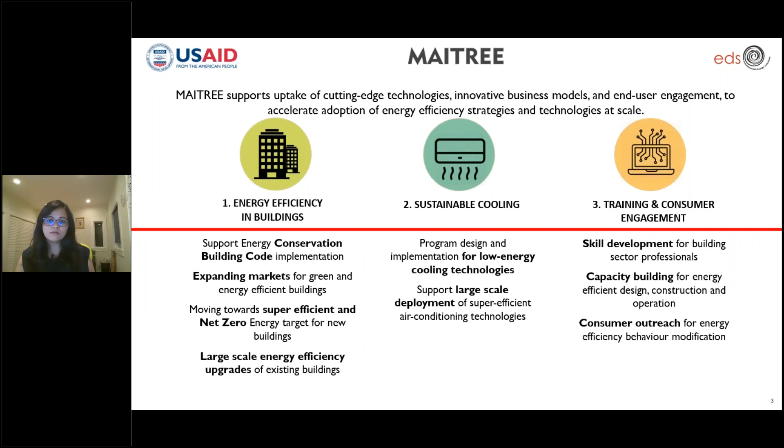The webinar series is executed under the MAITREE program supported by the USAID. MAITREE is the acronym for Market Integration and Transformation for Energy Efficiency. MAITREE supports three main program areas: energy efficiency, sustainable cooling, and training and consumer engagement. The program works in partnership with several organizations such as Energy Efficiency Services Limited, Bureau of Energy Efficiency, and others to implement various initiatives.

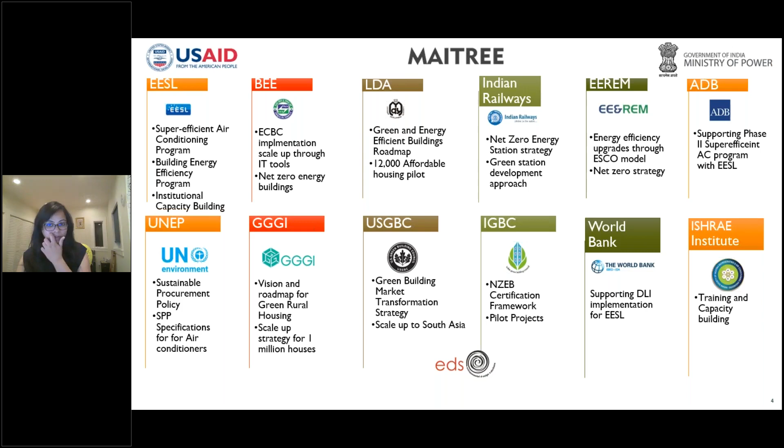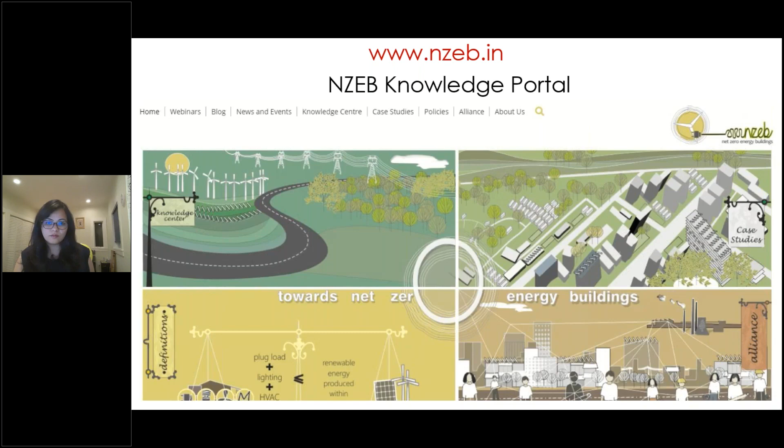The market transformation approach includes creating business opportunities for the private sector, scale up of potential initiatives, and enabling policies as well as providing trainings for net zero energy buildings. MAITREE is supporting efforts moving towards super efficient and net zero energy targets for buildings in India. The Net Zero Energy Building Knowledge Portal is a one-stop site for information on NZEBs. You may explore this further on the website nzeb.in.

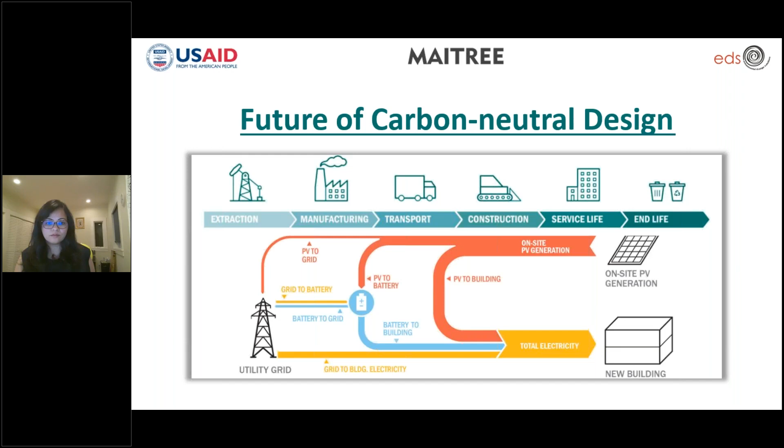In today's webinar, we are going to learn about the future of carbon neutral design. With growing demands to address climate change, we need to go beyond just addressing energy use in our individual buildings, taking an integrated approach to address both energy and carbon emissions through the entire life cycle of a building. Under the MAITREE program, we are working on grid integrative net zero energy buildings to spread awareness for accelerating the efforts toward decarbonizing, decentralizing, and digitalizing the grid of the future for India. We will share more information on it very soon.

Let's now learn about carbon neutrality from Shruti, the expert speaker for today's session. Shruti is joining us from San Francisco, where the time zone is just the opposite. It's 9:30 p.m. over there. Welcome to the webinar, Shruti. Thank you very much. Very happy to be here.

Shruti is an award-winning sustainability consultant with 15 years of experience in advancing sustainability within the built environment. She has led multiple highly ambitious and complex projects from laboratories, museums to master plans. Her work has been presented at several leading industry conferences. Shruti combines technical competency and creativity across architecture, engineering, and master planning, and has developed deep expertise in passive systems, energy optimization, and carbon management.

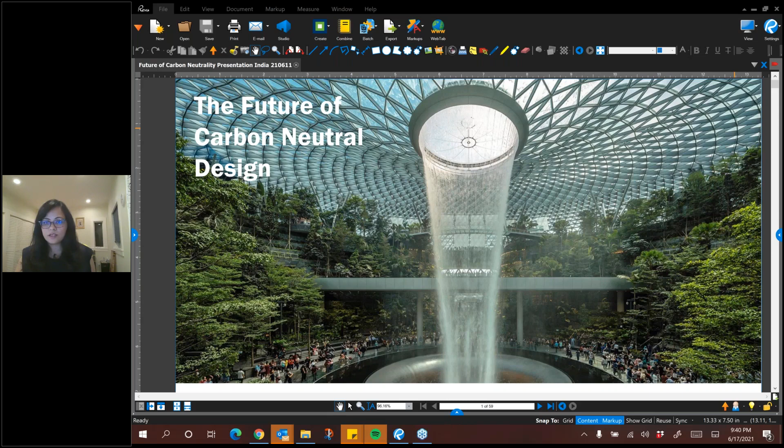All right, fantastic. Thank you very much for the introduction. Let me share my screen. Hold on for 1 second. Okay, are you able to see my screen now? Yes. Okay, fantastic. Oops. I'm gonna do it this way and get into presentation mode.

Thank you everyone for attending this webinar, and thank you for inviting me to speak on this topic, which is very close to my heart. Just a brief introduction: I'm born and raised in India and migrated to the United States several years ago. My professional experience has been in North America. In this presentation, I hope to share my experience in designing high performance buildings and where the future of carbon neutrality is in the context of North America, and also some parallels around sustainability issues and drivers that may be relevant for India as well.

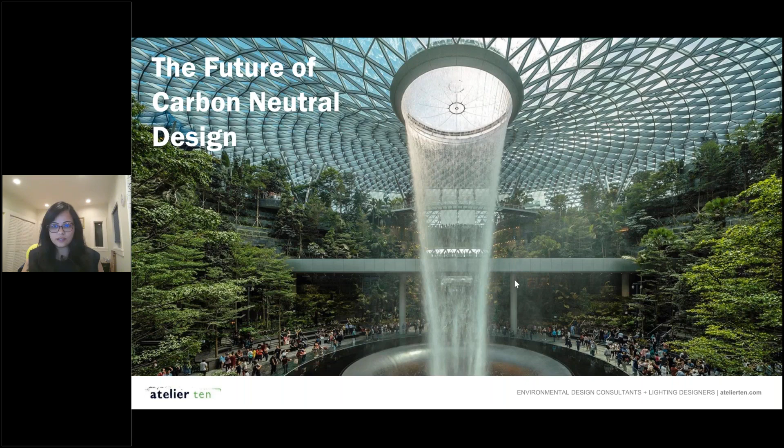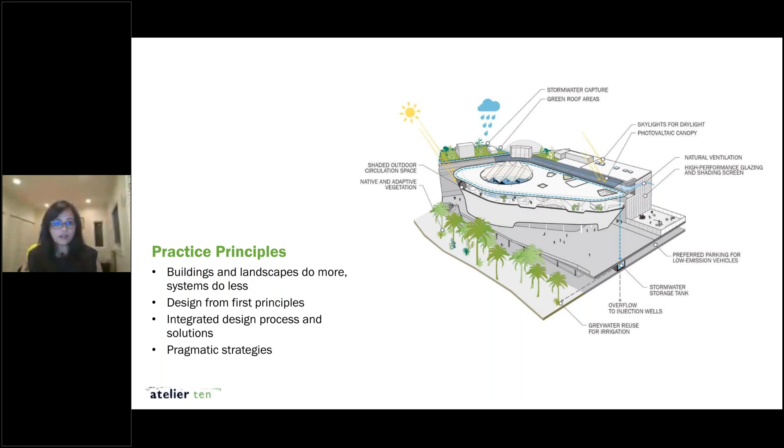A little bit about my company. I work for a company called Atelier Ten. We are a progressive group of environmental designers committed to making a positive change in the built environment, a team of architects, engineers, environmental policy experts and lighting designers lending our own perspectives. Our practice principle is that we want our architecture to do more, systems to do less, and be pragmatic in the way we design our buildings. We offer our services mostly through consulting, under the umbrella of what we call environmental design, which consists of many things listed here.

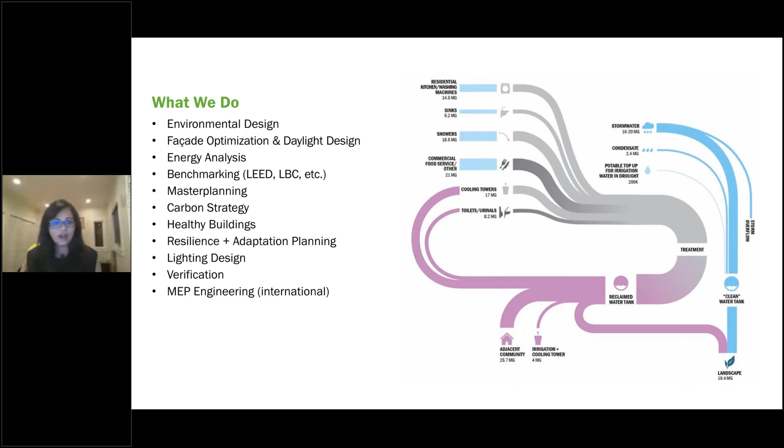And we have 11 offices around the world. We are quite global in that way, and we've been around since 1990. We run our company quite collaboratively and draw from all the international experience and climate zone and regional experience that we have around the world. I just put this slide together to give you some sense of where I'm coming from and what my perspective might be. So carbon neutrality has been a hot topic, at least in my world.

What we have been seeing and what we have been actively doing through our work is looking at carbon neutrality on a variety of building types and scales. So what you see here is a project that I'm actually going to present quite a bit in detail, the California College of Arts expansion project, which is a very fun project here located in San Francisco. It is a smaller project that deals with carbon neutrality in a much more meaningful way than we've done before. And it also has a cool hydrogen story. So I'll get to that in a little while.

We've also dealt with carbon neutrality on campus scales. We recently completed the UC Merced 2020 campus, which consisted of 11 buildings that were designed and built under 5 years. And they're all very high performance buildings. And the goal of the whole campus is to achieve carbon neutrality.

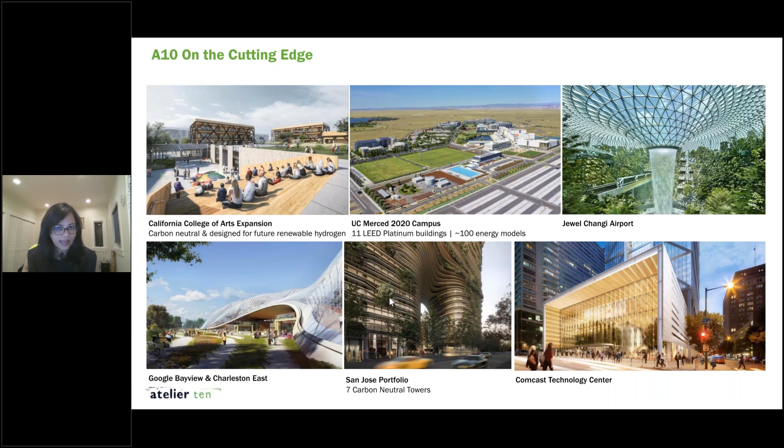And then the Comcast Technology Center here is also one of our highly performative projects, where it's a high-rise building in a cold climate, achieving really high performance goals. So again, just giving you a sense of the range of projects that we're looking at to move the needle and make progress here. And I have cherry picked one of them to present today.

So before we get into the particulars of the project and even the particulars of this topic today, why carbon? Why are we talking about this? And most of you may already be aware of this, but a few years ago, in 2018, the Intergovernmental Panel on Climate Change, the IPCC, released a new report. And the understanding before the 2018 report came out was that the critical threshold for acceptable climate change, global warming, is 2 degrees Celsius. That was considered to be a worldwide accepted threshold.

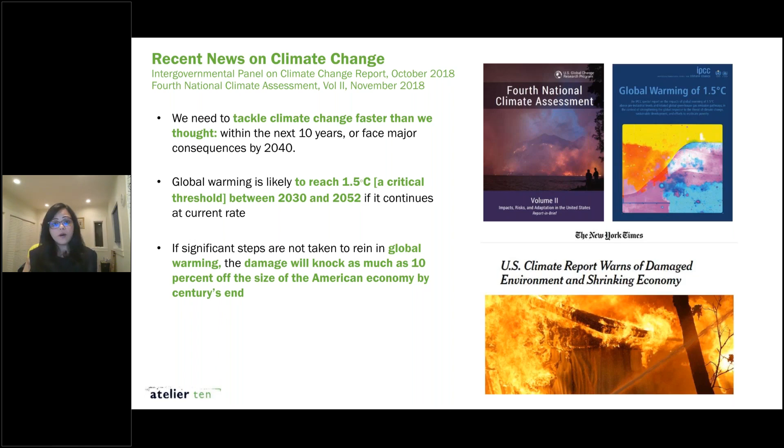And then in 2018, this report came out, in which the scientists warned us that, in fact, we need to be under the 1.5 degrees threshold, and that we are likely to start seeing effects of global warming as early as between 2030 to 2052. And just thinking of that for a moment, 2030 is literally 9 years from now. So that really prompted us to think about how we are talking about carbon and what actions we're taking right now in this decade to make a meaningful impact on the built environment.

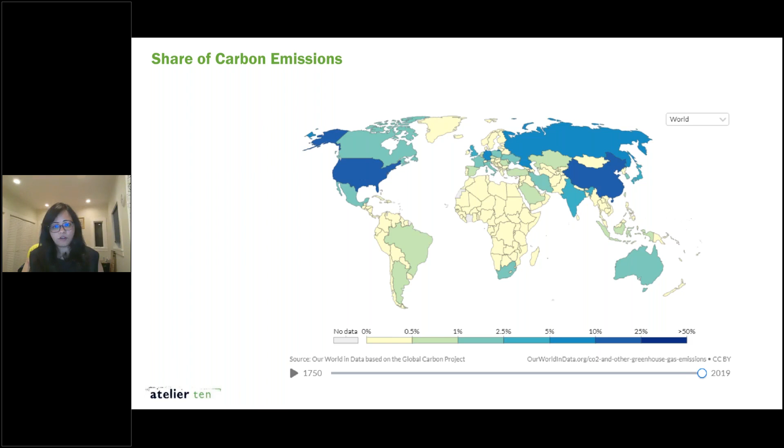And speaking about carbon emissions and climate change, inherently, climate change is unequal. There are certain countries who have contributed in the past and still do in a much more significant way to the global carbon emissions than others. And yet, the effects of climate change are spread worldwide and are unfortunately hitting the countries that may be least prepared to tackle the effects of climate change.

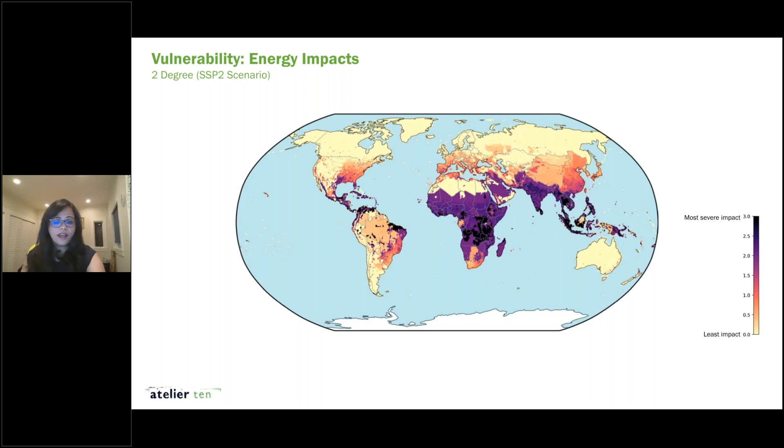And we're looking at a 2-degree scenario here. The next one, we're looking at the energy impacts, and this encompasses clean cooking access and heat events and cooling degree days, and also hydroclimate risk to power plants on how power will be delivered to cities and to houses. And then the land impacts, which covers crop yield change and habitat degradation and agriculture, water stress, and nitrate leakage.

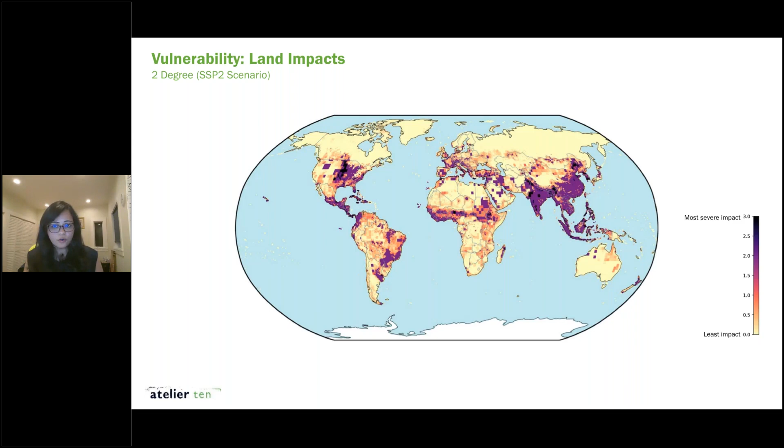So all these issues, as you can see, are very much relevant, and no matter the cause of climate change, whatever it is, I think it falls onto everyone to at least prepare for the effects of climate change. And I find this very interesting. I think India is on a cusp of a major revolution here, which is the opportunity of this decade.

And think about this statement for just a moment, that 70% of India's 2030 urban infrastructure is yet to be built. And so we're talking about from now until 2030. And India has signed up for the Paris Agreement, which commits India to reduce carbon emissions by 33 to 35% below 2005 levels in this decade by 2030. It also has committed in a non-committal way to having 40% renewable energy supply in the power mix by 2030.

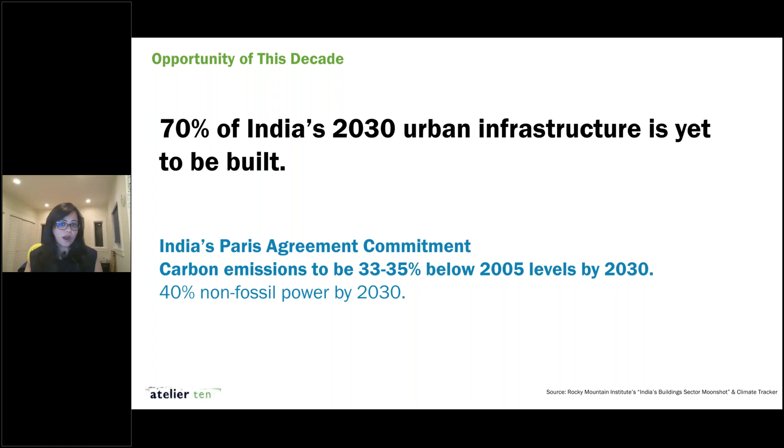So this decade seems like there's a lot of things going on that are especially in architects and designers' control, and that'll tell how the future of these buildings that are being built, that are being conceptualized right now, and that'll be built in the next decade, and that will be occupied in the next 50 to 70 years, how those contribute towards climate change.

But really, for India, I feel like, and also in several parts of the world, it's not just about climate change. It's not just about reducing greenhouse gas emissions. That is, of course, the priority of how the buildings can reduce carbon emissions at all life stages. And we'll talk a little bit about this, all life stages, in more detail.

But then it is also about energy and water security, of how do we design strategies and how do we design the built environment to have reliable access to energy and water all year round. And at the same time, how do we also get the buildings ready to operate without water and power, at least at certain times of the day. And then, building in resiliency on how do we make the buildings ready to combat the effects of climate change.

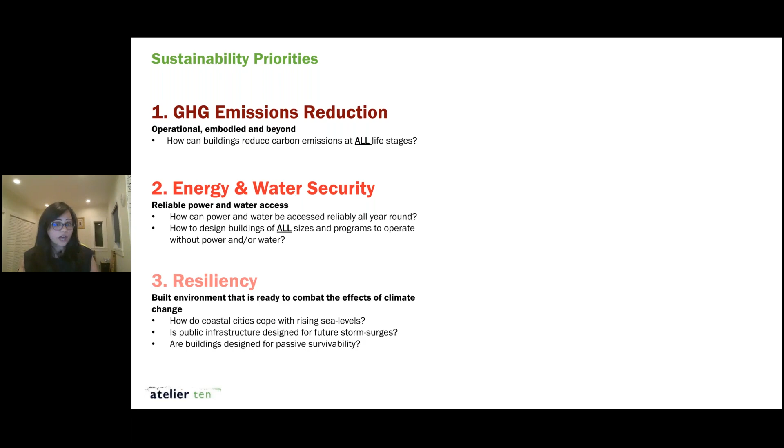And the issues vary depending on which place you're looking at. So how do we identify those issues? So for me, climate change and reducing greenhouse gas emissions and designing for carbon neutrality is considering all these elements and hopefully coming up with strategies that address all of them. And just to again put it back onto my experience and what we deal with on a day-to-day basis. Here in the United States, it's no different.

San Francisco, California, sorry, has committed to having 60% of its electricity be carbon-free by 2030. So similar targets. And then also has committed to have all electricity be carbon-free by 2045. New York is slightly ahead here, very competitive, 100% renewable electricity by 2040 and 70% renewable electricity by 2030. So again, we are seeing a similar kind of movement going here in the United States, this decade being extremely important. And I'll talk a little bit about the time value of carbon here as well.

In addition to that, we are also seeing through codes and standards a shift from not just requiring renewable energy be embedded into reducing the operational greenhouse gas emissions of the building. We are also seeing that state agencies are asking to consider embodied carbon emissions of materials into the buildings, and that therefore is becoming more of a state-driven conversation now than private developers or owners individually coming up with those targets, which is a great thing.

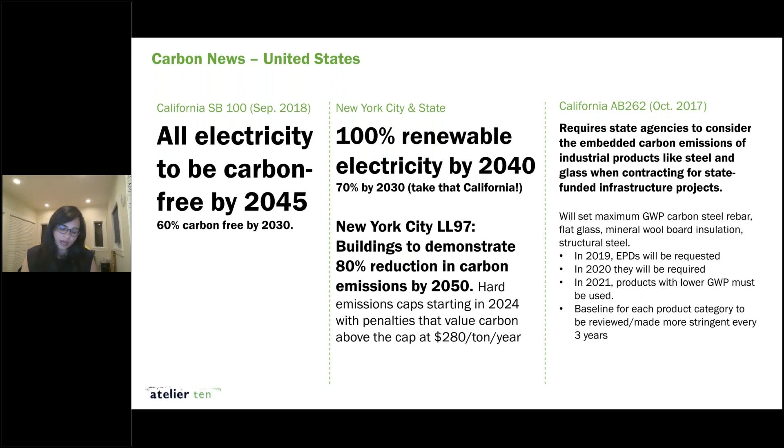carbon-free 24/7, the embodied carbon of materials, and then the boundary can be expanded very well, and it is a very meaningful impact if we do so, including refrigerants that go into our buildings, whether it is through air conditioning or through processes, waste that is coming out of our buildings, whether that is through consideration of circular economies and deconstruction of materials and assemblies, and operational waste as well as water.

Energy consumes water and water consumes energy, so there's an energy-water nexus there. Transportation, the energy required and the carbon emitted as a result of people going back and forth. And then the piece that can meaningfully be a positive element in all of this, while everything else is consuming and producing carbon emissions: landscape carbon sequestration. So we'll talk a little bit about that as well.

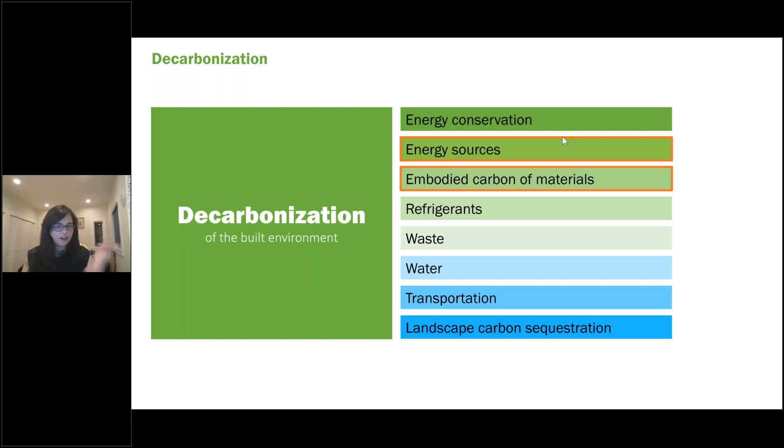So in this presentation, I have mostly focused on energy sources and embodied carbon of materials, just because otherwise it'll be a very, very lengthy topic, but happy to have more discussions around any other topics as well. So let's dive right into embodied carbon. You may already know what embodied carbon is, but for those of you who may be new to this, the idea here is to look at the materials that get built into the building through their entire life cycle.

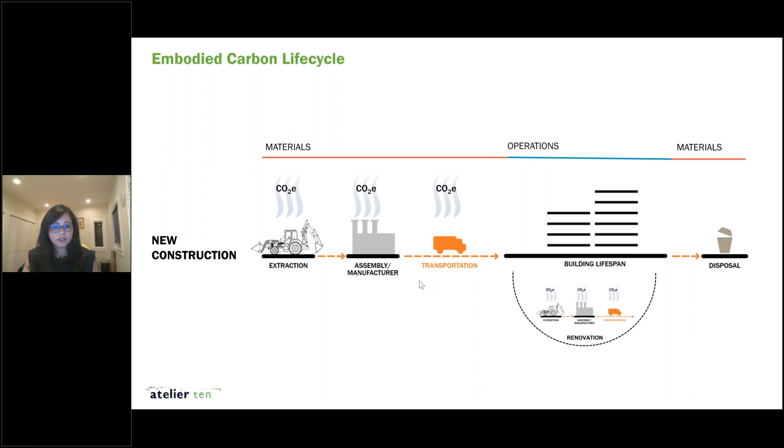So let's take a new construction. Materials that get built into the buildings have to be extracted first, and then they have to be assembled and manufactured and then transported, and then they get put into your buildings. Through the life of the building, there are renovations happening, so all of those, the energy associated with those renovations. And at the end of life, there's the disposal. So all these stages within the life cycle of building products emit CO2 emissions and are responsible for a lot of carbon emissions.

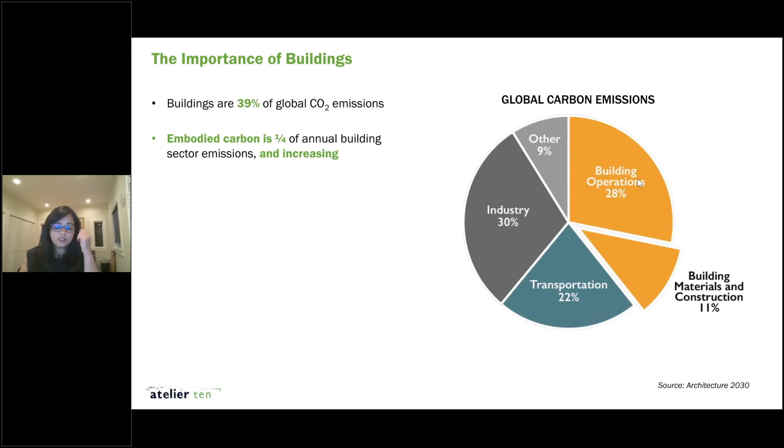So you may have seen this also, that buildings are about 40% of global CO2 emissions. And until now, there was this other stat floating around, which was that building materials and construction is about 11% of that, and building operations is 28%. So this is more important: how do we make our buildings energy efficient?

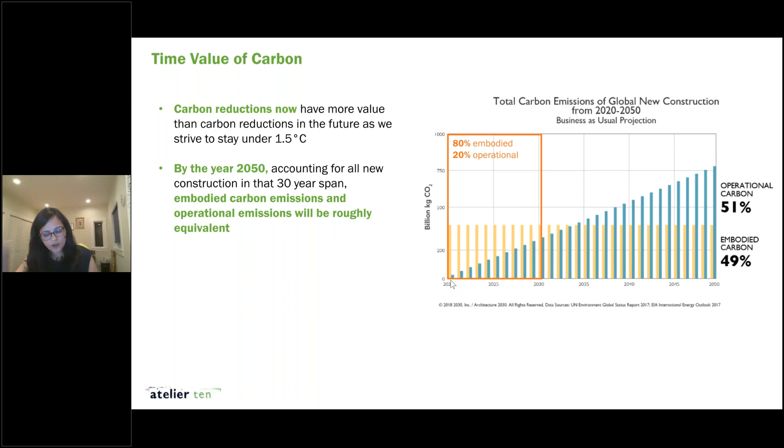So we started doing this recently on projects where we routinely do LCAs, which is short for life cycle analysis, which is basically taking all the materials in the building and quantifying them, and then figuring out the CO2 emissions associated with each of those materials, and then giving a number in terms of what the overall building embodied carbon emissions are.

And it was very usual to look at a 60-year life period for a building, and then compare the embodied carbon emissions of a building to the operational carbon emissions, and it always looked like a smaller fraction. But if we start looking at it for 20 years instead of 60, then we quickly see how important embodied carbon is in comparison to operational carbon.

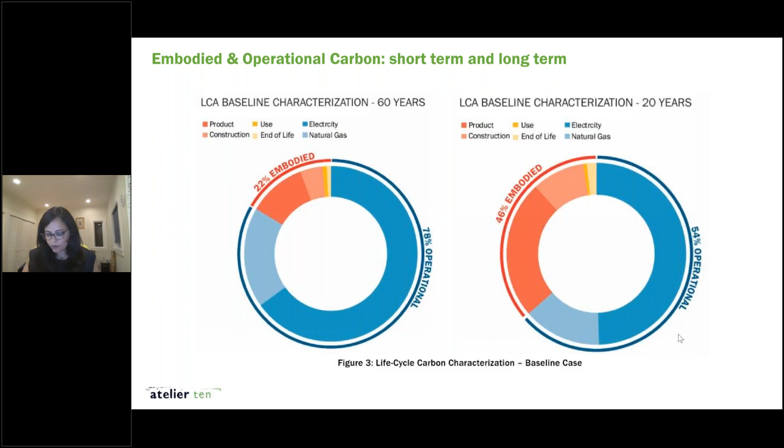So many exciting things have happened in the last 5 or so years in the world of embodied carbon life cycle standards. And I tell you, like 15, 17 years ago, in school when I was doing my master's, we tried to do an LCA of a product, and there were no resources, there were no standards. Information was not out there. The suppliers, the manufacturers that we were calling couldn't understand what we were talking about. The world was just not there.

And some smart people have put together their brains in these last few years and really decided that this needs to change and come up with processes so that architects and designers can do apples to apples comparisons between products and make better decisions for their buildings.

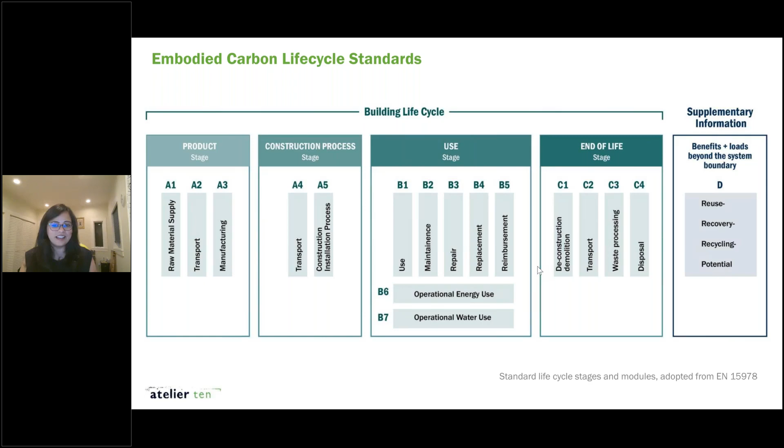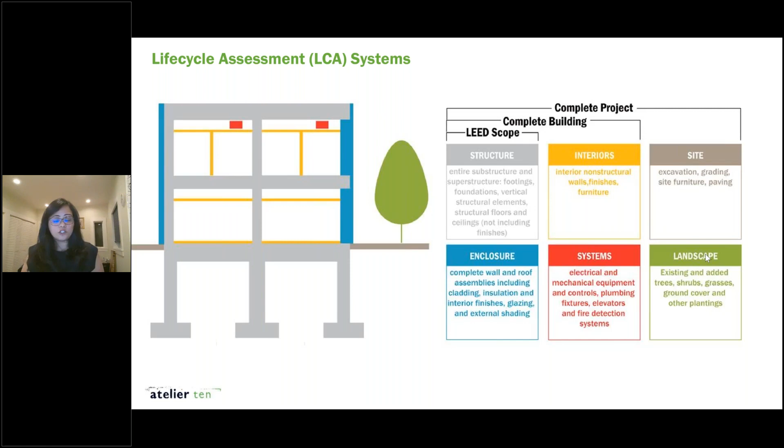all of those together. And then, again, there's this opportunity to push the boundary here and include a complete project, which would include your site, which is the paving and your grading and excavation, all of those elements, as well as landscape. So those of you who care about benchmarking, LEED has started recognizing whole building life cycle assessment, and there are up to 3 points available for it. And then also ILFI zero carbon certification, if you are interested in that, also gives projects a lot of credits if you're tackling some of these challenges.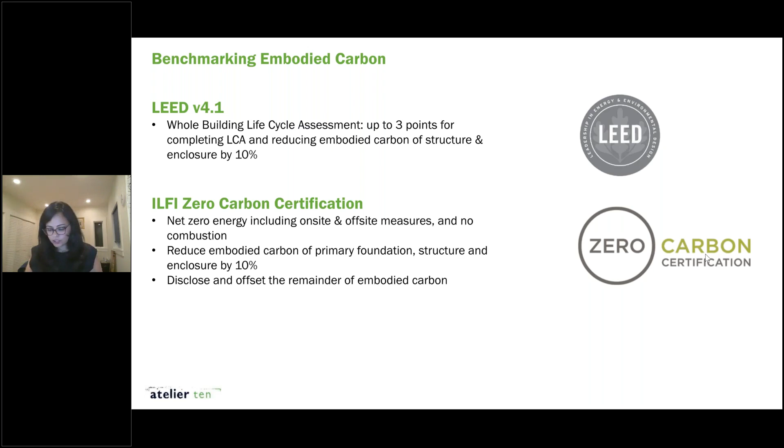And the way we start looking at some of these issues in early design, oftentimes, we start on a project and all this information isn't available. We don't exactly know how all the materials are going to get put together. And we don't want to get caught into this analysis paralysis type of a situation. And so, in early stages, we find it to be perfectly all right to do a material level comparison.

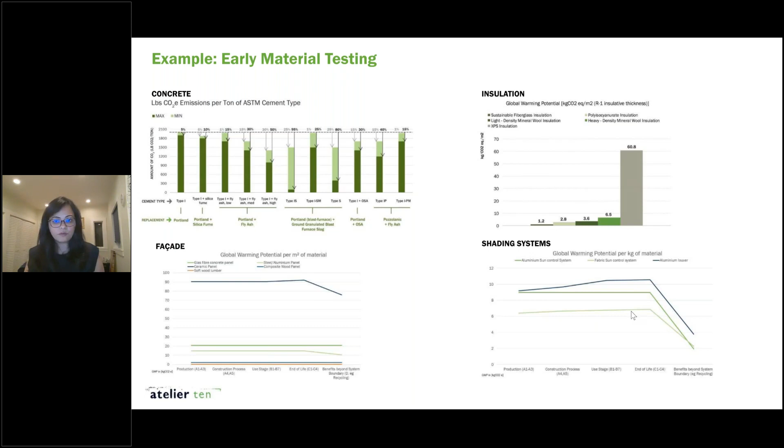And achieved pretty good reductions, 50%, and in some cases lower than that, overall reductions just through optimizing concrete. So I know that that is quite business as usual in India, but again, quantifying that and figuring out where a big dent can be made can really move the needle on the project.

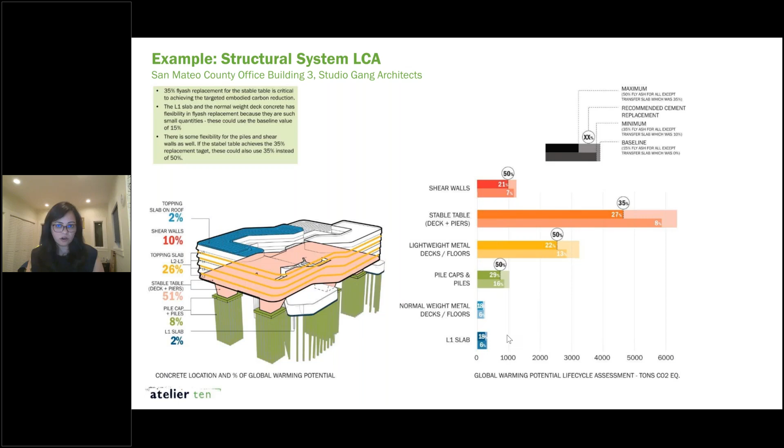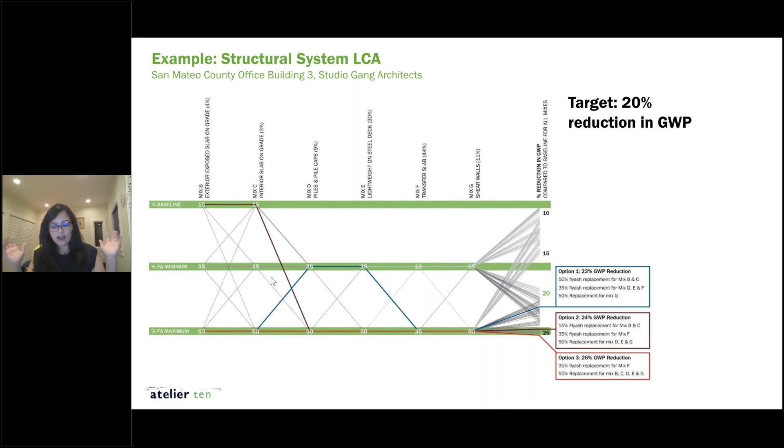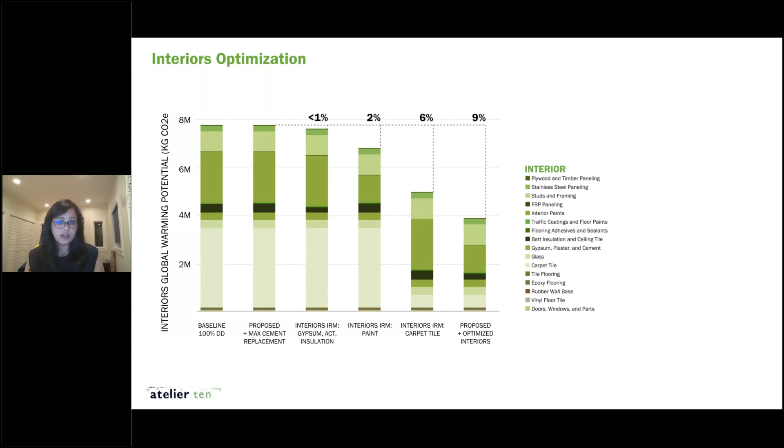I talked about interiors a little bit, so I'll mention this. For interiors optimization, we've also worked quite a bit on how impactful interiors can be, and this is for one of the tech headquarters projects here in Silicon Valley. We found that just isolating interiors and looking at interior products, which often get neglected, like interior paints, carpet tile, insulation, gypsum board and tile flooring, all these elements put together, not going out of our way, just reading information about these products, making some wise decisions and tracking it gave us about 10% savings in just the interiors GWP reduction.

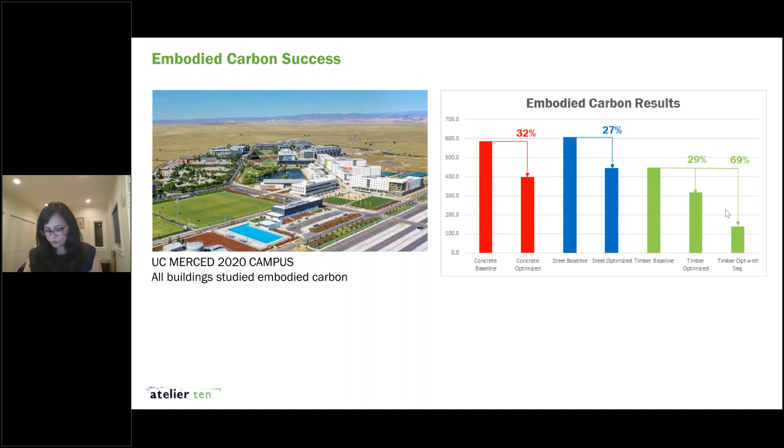And then timber is a big deal these days, and sourcing timber is a very important criteria there. Just selecting timber as a choice of material isn't necessarily going to give you any different reduction in carbon emissions, but sourcing that timber correctly so that carbon can be sequestered, which is the big differentiator, can really move the needle and get you up to 70% savings.

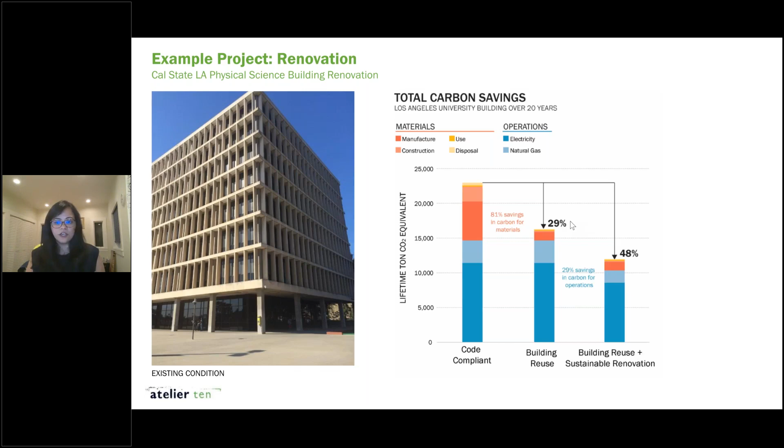Last, before I move on to another fun topic and present the case study, is the Pathfinder tool. We partnered with CMG Landscape Architects, a local landscape architecture firm here in the Bay Area. The idea here was that for projects that have a big landscape or open space component, that's the only element of the project that allows you to actually sequester carbon and be climate positive.

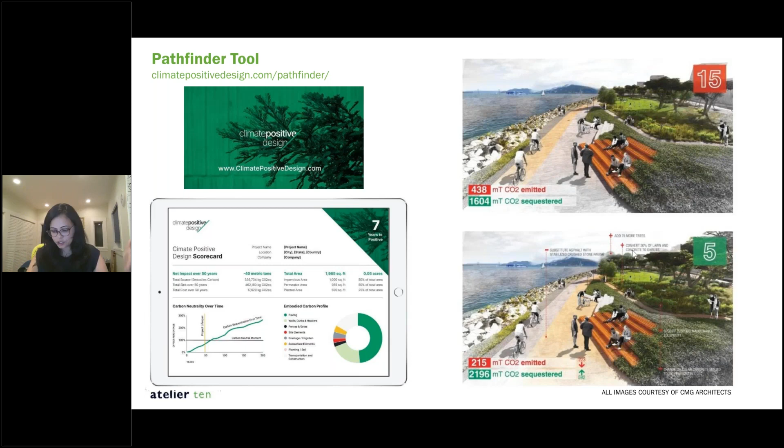So next, I'm going to change gears a little bit and talk about operational carbon, which is the carbon associated with operating the buildings. In these last few years, we've done some deep thinking, and we are really changing the way we think about greenhouse gas emissions and energy use. And I'm going to tell you why.

The fundamental process of designing buildings to reduce operational carbon emissions is still the same. Our vernacular architecture in India and the critical regionalism that we see all over India is fantastic. The best thing that we can learn from traditional Indian architecture is the passive systems. Now, how that gets applied to dense urban locations, and also taller buildings, is interesting. And that's where I feel active systems, plant design and integrating renewable energy all come into the picture.

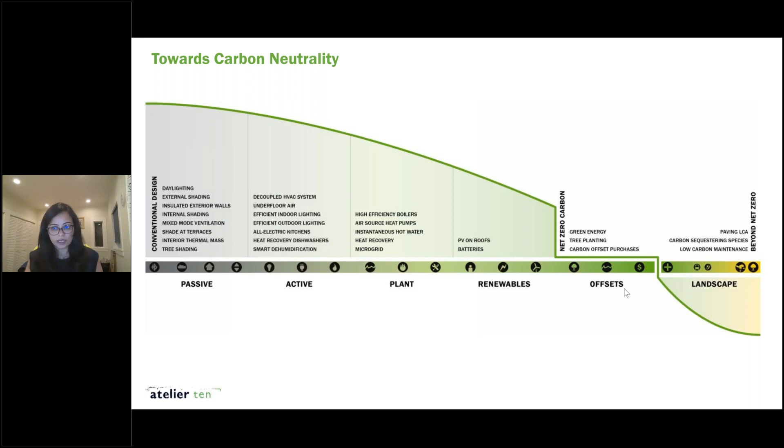So we believe that any good design should start with a really robust passive scheme, and that's the way to go. And then optimize your building using active systems and using high performance plants, integrate renewable energy as much as possible, then look at offsetting on your own site, and then integrate landscape to make it a carbon positive building if possible.

Now, one thing that we are so glad has happened, I kid you not, for the last several years, we kept on pondering when any net zero definitions were thrown around on why are we not talking about carbon? Don't we care about climate change and carbon emissions? Why are we not talking about carbon? Why are we talking about energy?

So here's the graphic that we had produced, I don't know, at least a decade ago, if not more, to explain the differences, which was when we're talking about site, if this is your building, we are measuring the energy right here at the meter. When we are talking about energy cost, we are talking about, again, the energy measured at the meter, and here the dollar value or the rupees value that is being paid at the meter.

California had its own definition, which was source energy, which was basically like somehow measuring it here, but then also factoring in some transmission losses and whatnot. And they were trying to get to carbon emissions, but not quite. And then straight up carbon emissions.

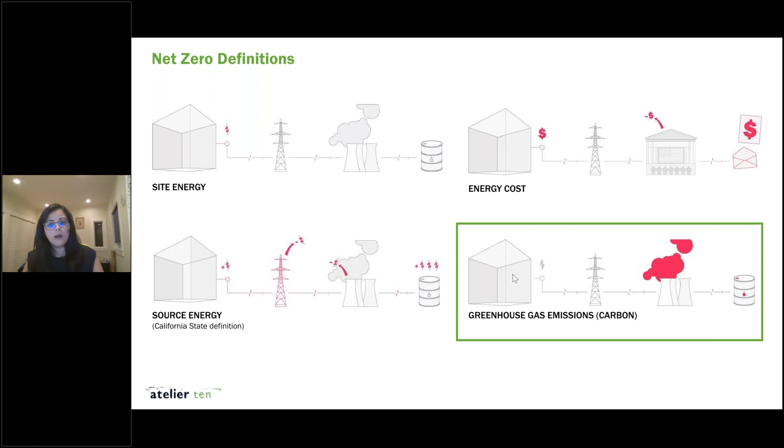And we are so glad that we are finally talking about carbon emissions, which is what we should be caring about as architects and designers, because our buildings are not islands in most cases. Some of them are. But most of them are grid-connected buildings, and our buildings have a large effect on not just what goes within the building, but also on the larger grid. So not all energy is created equally. So why did we not like using energy use as a proxy for carbon emissions?

So yes, reducing energy use within your buildings is a great idea. Knowing when your building uses energy is a great idea. And saving money while doing so is also a great idea. But it may not have the same effect that you thought it has on carbon emissions. And the reason for that is that carbon emissions of your building is totally dependent on how the grid is operated. It has less to do with what your buildings are demanding and more to do with how the grid is operated. So grid emissions vary by time.

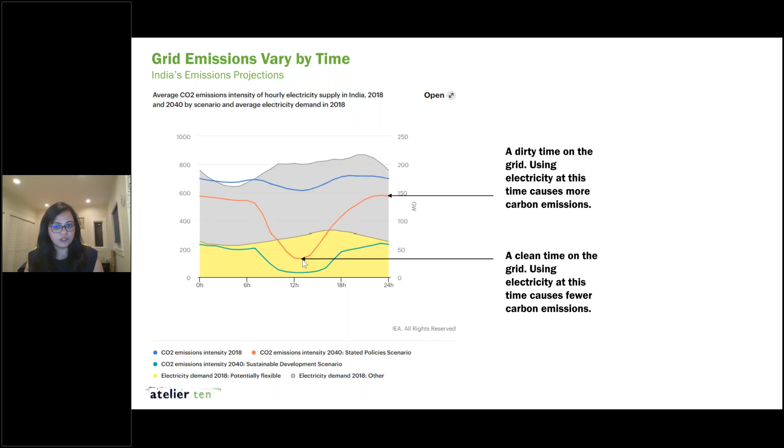So using electricity at this time is going to cause fewer carbon emissions. And you know what? What I showed you is a projection for 2040 for India. We experienced something almost identical in 2015 in California. For the last 15 or 20 years, there have been several incentives in California to add solar, both on the utility side as well as directly onto the buildings.

And what that did was, so the blue line here was the actual energy use on the grid. And it used to be, again, quite flat. It did sort of peak in the evening, but it used to be pretty much flat during the daytime. And then as more and more renewables got added onto the grid, it started dipping. And that got famously named as the duck curve, because it looks like a duck. And the belly of the duck is basically where it dips.

And that changes completely our thinking around where we should be focusing if we are trying to reduce the carbon emissions of our building. And how can we control the carbon emissions so that we can take advantage of the times when there's a lot of renewable energy in the grid, and how can we shift the load of the building from one hour to the other.

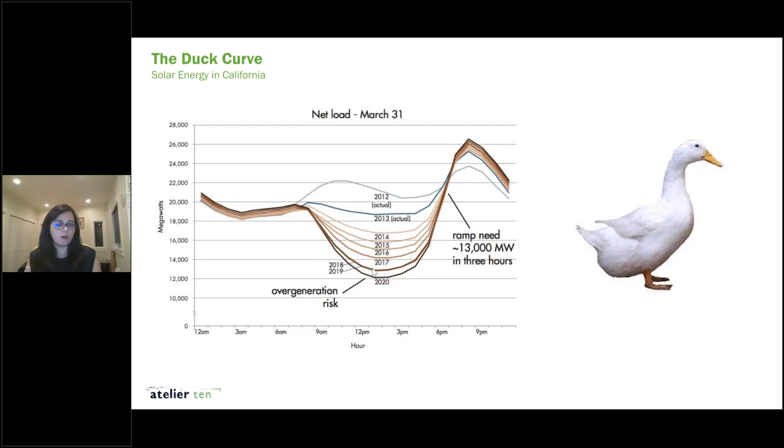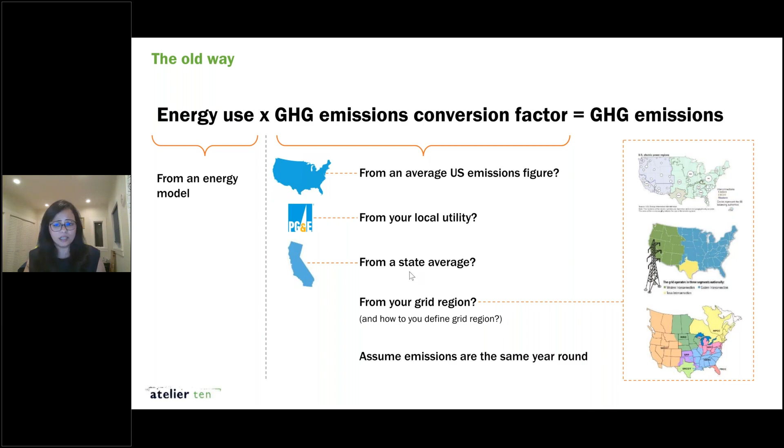So the old way was to look at the energy use of your building and then figure out your greenhouse gas emissions factor, which was either an average number, sometimes an annual average number, maybe from your local utility or from a state average, and then multiply those two and you have your greenhouse gas emissions. Not

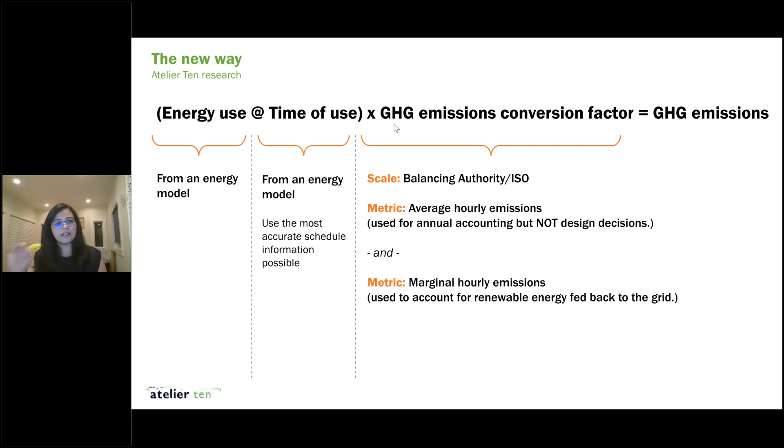accurate anymore. So the new way is basically looking at the energy use, which is what you do through your energy models, through your simulations, but then looking at it at different times. So factoring in the time of use in that. And then looking at the greenhouse gas emissions conversion factors on a marginal basis. And I'll get to that a little bit. So integrating that time of use is an important consideration now.

And to understand why this is really important, these are the balancing authorities, how the grids are laid out in the United States. And if you follow US news in any shape or form, there was a major storm and a grid incident in Texas, which is right here. And this grid region, this gray blob here, isn't connected to other grid regions, and that caused a lot of problems. Traditionally, all these grid regions are electrical networks that are all interconnected, and they exchange electrons, and they're balanced in a way so that we get electricity.

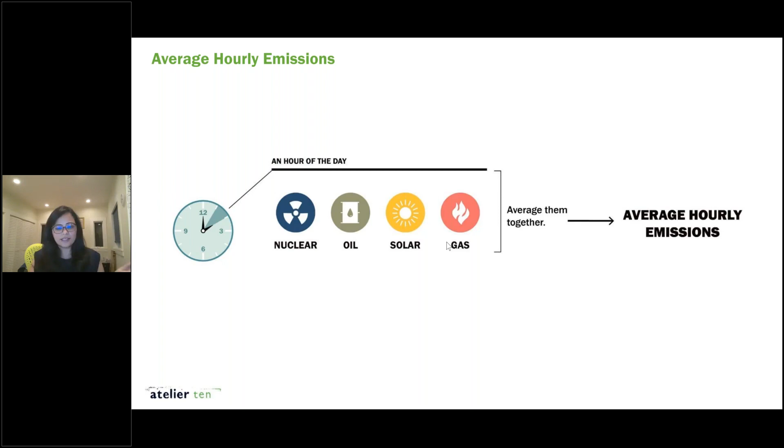So the average hourly emissions basically look at the power mix at your utility, whether it is a mix of nuclear and oil and solar and gas, and then average them together, and that's your average hourly emissions.

Marginal emissions is really what we care about, and that's the true metric that we should be using. There are several plants that the grid is extracting electricity from, but for the new load that you as a designer are helping design and is getting built, there is a plant that has to be turned on as a result of the new load. And the emissions that your building is responsible for, therefore, are the emissions associated with that plant, and that in the technical context is called the marginal hourly emission. So that is the real effect of your building,

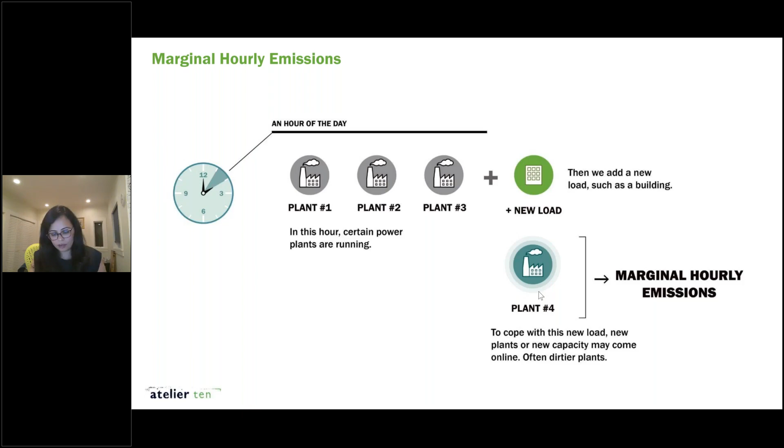your building's carbon emissions. So the gist of all of this is buildings are not islands. They are a connected resource in a very large network. And beyond good building design, which includes load reduction and demand response and all the good things that we have learned to do in building high performance buildings, in addition to that, there is the grid connection and the fuel mix that needs to be factored in to be able to meaningfully reduce carbon emissions of our buildings.

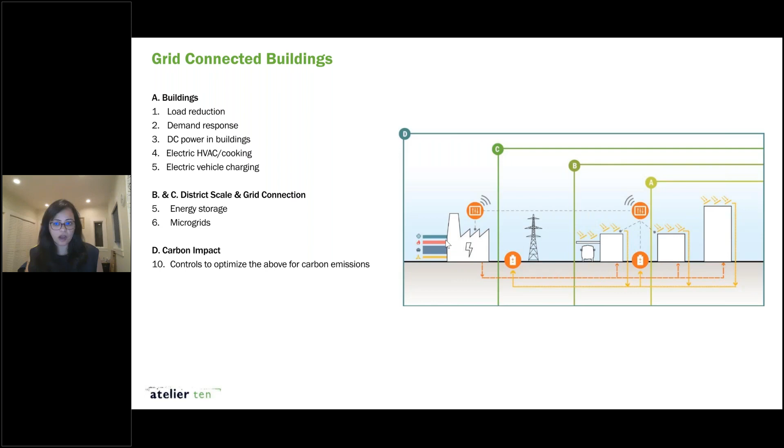So if you are interested in more on this, we have a white paper written by my colleagues, The Future of Carbon Neutral Design. It can be downloaded from our website. Here's the link. And if you have more questions, very happy to talk to you about any of those.

So I'm going to spend the last few minutes here, I know we're going to run out of time very quickly, showing you the application of some of these concepts. So designing for carbon neutral, I'm going to present the California College of Arts project with Studio Gang.

This is San Francisco right here, and California College of Arts is an academic building that you see here. If you are familiar with the geography here, they have a campus in San Francisco. They also had a campus in Oakland, which is just across this bridge here. And they decided a few years ago that they want to consolidate it all together in San Francisco. So that's what they planned on doing.

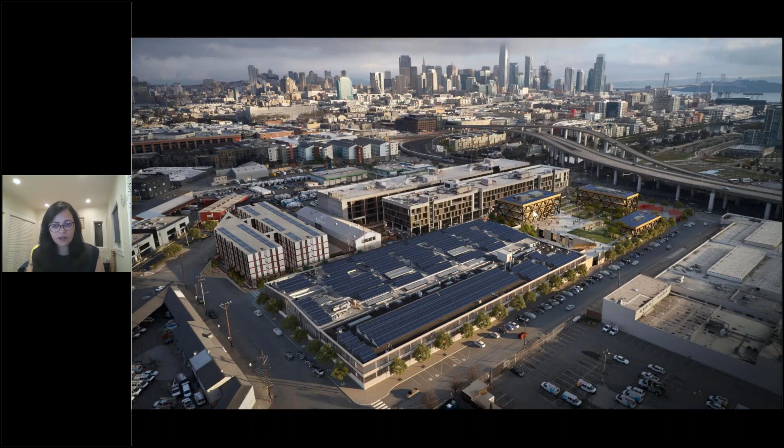And then we got this project and we were like, oh, it's a high performance academic building. I think net zero energy was how it was labeled at the beginning. And we were like, oh, we have this down. We can completely do it. We know how to do it. No problem. And we started working on it. It consists of this big podium here and these two buildings, a nice open space.

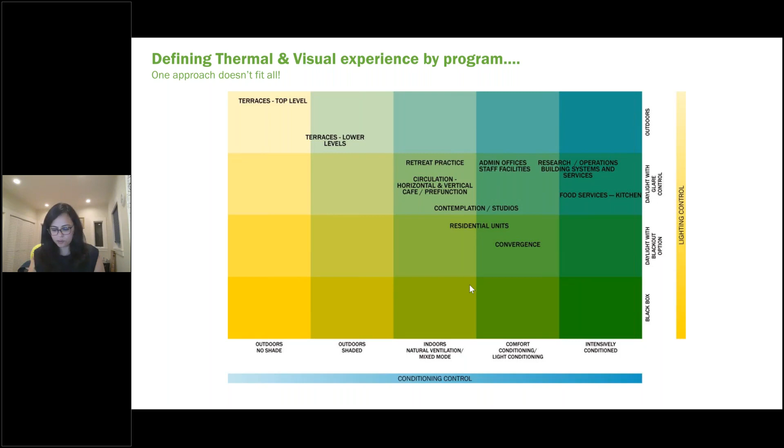We started with all those passive concepts that we were talking about. Let's define the thermal and the visual experience so that we know where we can utilize natural ventilation and passive design and shading and all these great lighting and conditioning controls, and identifying where a variety would be okay. Then we developed several concepts around interior and exterior shading, passive cooling, night flush, thermal mass, natural ventilation, daylight, all the good stuff. Had some holes into this large plinth to move the air and make natural ventilation work.

And then reality hit, which was that, yes, we can make an academic building really high performance and get its energy use down as much as possible, no problem at all. However, this is an arts building and has what they call the makerspace. The makerspace is the space where they do all sorts of cool stuff. They blow glass, they create sculptures, or make all sorts of art. It is a very energy intensive space.

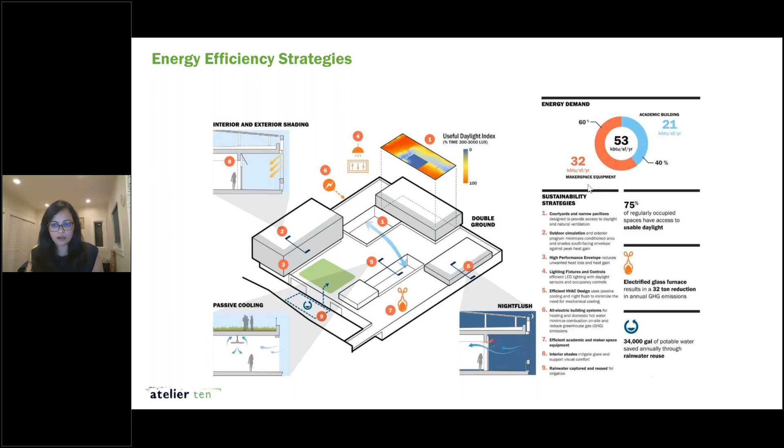And you can't just take away electricity because you want to make it energy efficient. That is the process. That is the purpose of this building. So the makerspace equipment, you can think of it as some process load or industrial load that cannot be taken away. And yet this building had to be a carbon neutral building, as we learned more. So we again ran the best of the analysis.

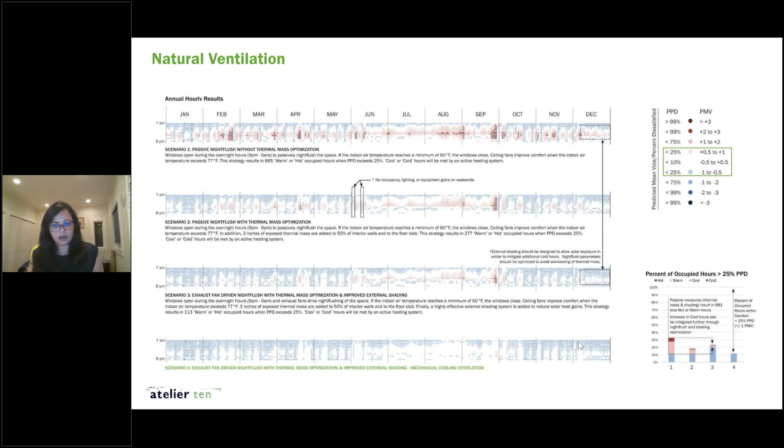And in the end, what it came down to is that, yes, here's the energy distribution of the academic building, and we can get it really down and minimize it to some lighting, some fans and plug loads. But what about all of this? We really can't control this. So how do we deal with that? Put PVs onto the building.

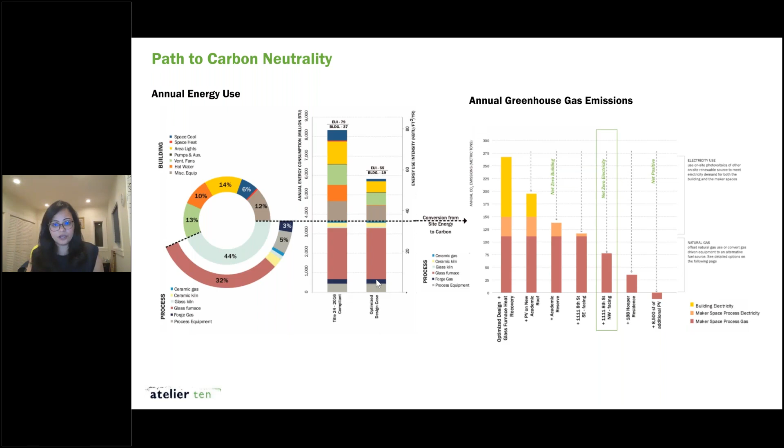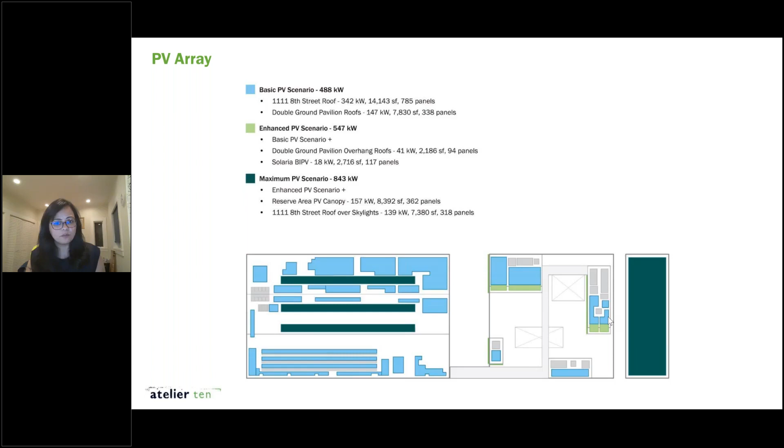And we did that. So this is the actual buildings here, and we looked at the roof of the neighboring building and put PVs all across that roof and our roof and maximized it, and yet we couldn't reach carbon neutrality. So that's when we started thinking how we can utilize the PVs that we have and some of these natural ventilation passive design strategies to our advantage, and really understand how carbon is emitted throughout the year, and how the grid is operated so that we can shift it around.

So basically what we did as a result was, we have this efficient building, we have PVs on the roof, we added batteries in and essentially created a microgrid out of this. What that means is that we have control over where the electrons are flowing. We can push the electrons from the PV system into our building.

We can push it to a battery, or we can push it back to the grid, depending on what is the need of the building. And then what is that based on? That is based on the grid greenhouse gas emissions. So looking at what the grid is doing, if the grid is really dirty, it is time to use PV. If we can project and predict that the grid is going to be dirty tomorrow, then we produce PV, we produce some excess and put it into a battery so that we can use that during the time when the grid is really dirty. When the grid is really clean, why use PVs then? Let's use the grid electricity.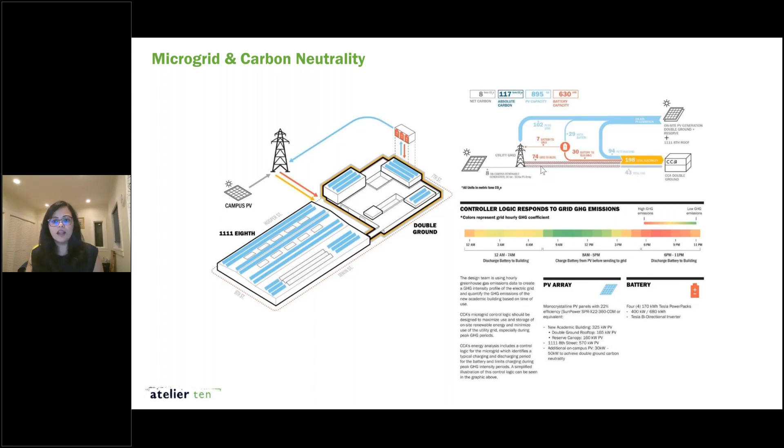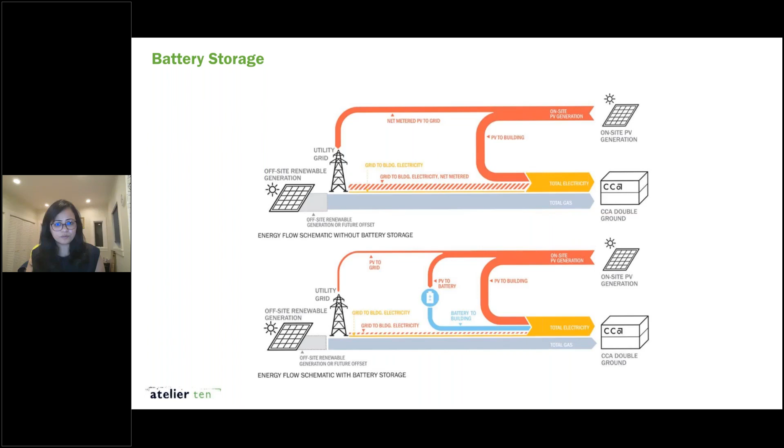So doing this balancing, that's the controller logic that we developed to basically maximize both PV array production, the battery charging and discharging, as well as how the passive systems were working together with these. And that was basically the concept behind getting to net zero, getting to carbon neutrality on this project. And here are some of the graphs that are showing how shifting that load from PVs onto the batteries allowed us to save carbon emissions, especially during the times when the grid is really dirty.

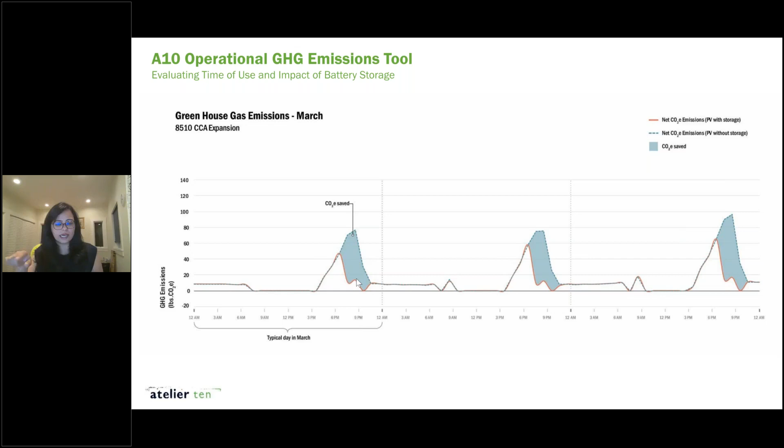One of the cool things that we also looked at, and this mostly came from the ownership, was to look at renewable hydrogen as a possibility. So here the idea is that we would have the PV that we had, but in addition to that, if we dedicate some on-site PVs to produce electricity that then can be used through electrolysis to create renewable hydrogen, that renewable hydrogen then powers a fuel cell, and the fuel cell we can use whenever we want. So we are not tied to the carbon emissions associated with the grid, and we are essentially creating a fuel on site that is completely renewable.

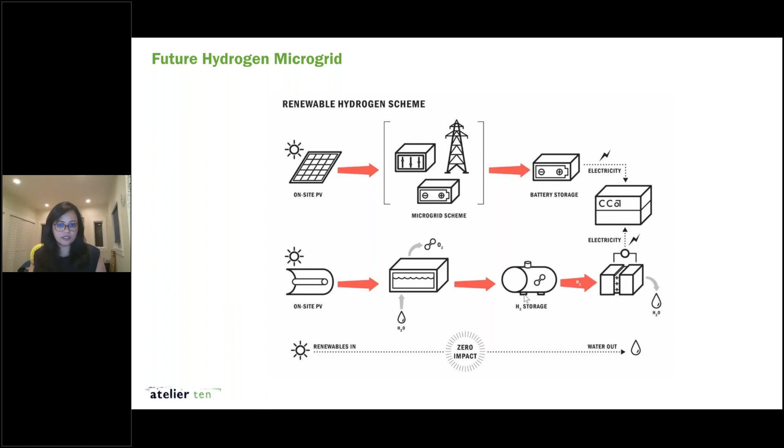This was an exploration, and if you Google hydrogen microgrid or hydrogen economy, you'll see that there's tons of research and tons of money being put into developing these products. We believe that maybe a packaged product like this will become available in the future. Right now, the technology isn't there, but we do think that hydrogen is going to have a pretty significant part in our solution to get to carbon neutrality for the bigger built environment. And that is pretty much it.

My apologies, I'm a minute over here, but I hope that is okay. And I'll stop sharing for a bit. Are people still there? Yes, yes. I was for a minute. I'm like, okay, what happened?

Okay. Thank you for sharing your case studies, ideas, and the strategies which can enable a shift from net zero energy buildings to carbon neutral buildings. We should also aim through wise design and material choices. We can create efficient buildings with low energy use, which can be supplied from renewable energy sources. And we really need to change the way we think about energy and carbon emissions, so that we can also balance these emissions by climate positive initiatives, so that the net carbon footprint over time can be zero.